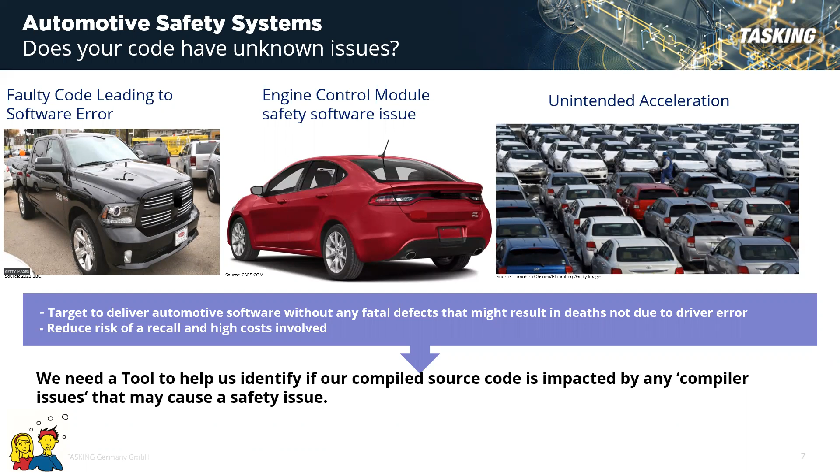What we need is a process and a tool support to help us identify such defects. Now let's look at why it is important and complicated to find out the bug. So vehicles are getting intelligent and safer every year. There might be 30 to 100 plus ECUs inside a vehicle running complex algorithms. The future vehicles may have a limited number of ECUs performing much more complex operations.

And this is because OEMs are trying to combine multiple functionalities inside a single ECU. This will in turn have a direct impact on the software because the software will get much more complicated. In practice, software from multiple vendors goes inside the ECU, thereby running millions of lines of code in it. It is possible that some issues are found in the software running inside the ECU, and this will be fixed by the person who is responsible for the software.

But there is one common thing amongst all the software vendors, and that's the compiler. Analyzing and fixing the compiler issues in the millions of lines of code is a nightmare. To overcome such a nightmare and to make the life of our customers easy, Tasking has introduced a new tool, and that's Tasking TriCore Inspector.

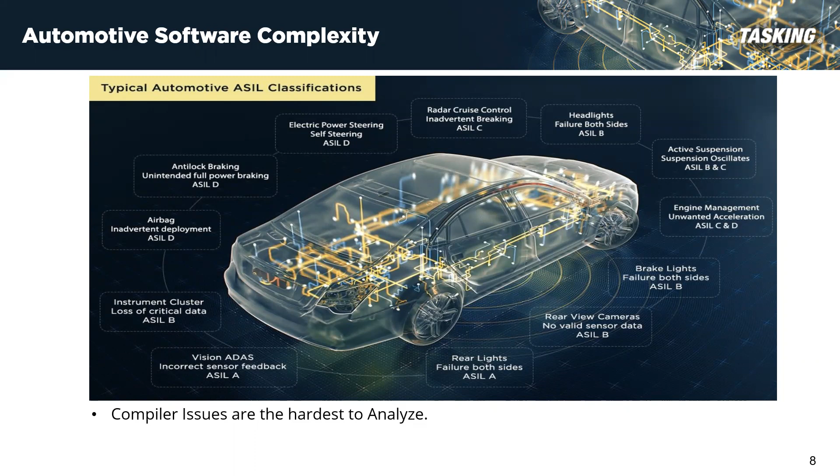We want to make sure users can run tests automatically to detect the toolset issues inside the software code, thereby reducing their risks. So, how can customers reduce such risks? This will be the content of the webinar, which we will discuss for the next 15 minutes. Let's take up a real life problem at the customer.

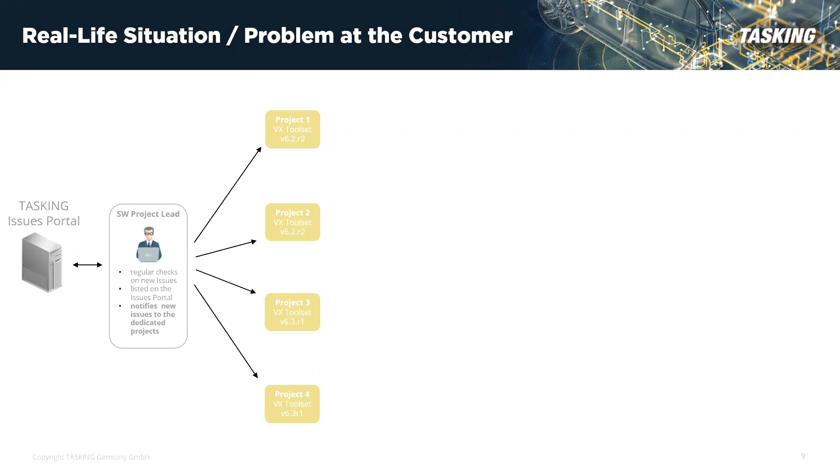Customer problem arises from the duties out of product liability regulation, which makes the system provider responsible for the specified product functionality. Depending on the intended use, let's say, for example, safety functions, the customer's risks are large. Therefore, the customer follows regulations and standards to reduce their risk, proving that they did all that is possible from their end. One of the customer's measures to have the risks controlled is state of the art sub-supplier management, which in our case includes the duty to monitor our errata sheet.

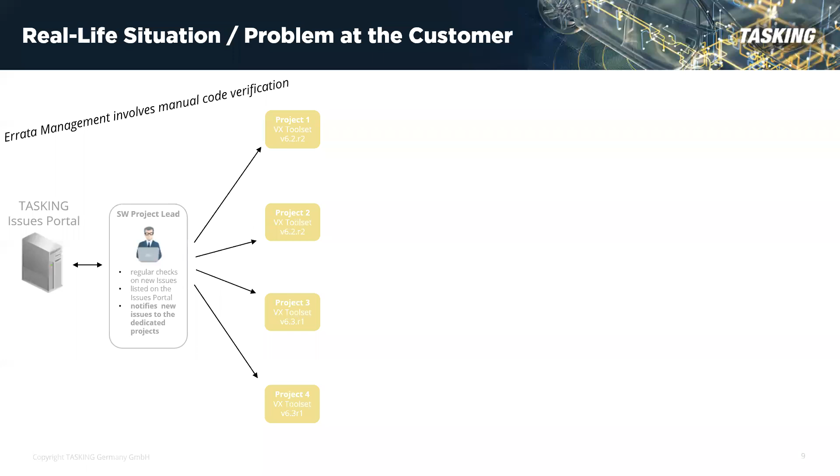So in the real life situation where your project is close to an SOP and you receive a safety critical compiler patch from the compiler vendor. So now you analyze your software and you have got two options. You analyze the software and make sure that you are not affected by any of the issues fixed in the patch, or you are affected and you apply the patch, test your software again, and qualify it for safety. So in both cases, you are spending significant effort and time on your analysis or code review.

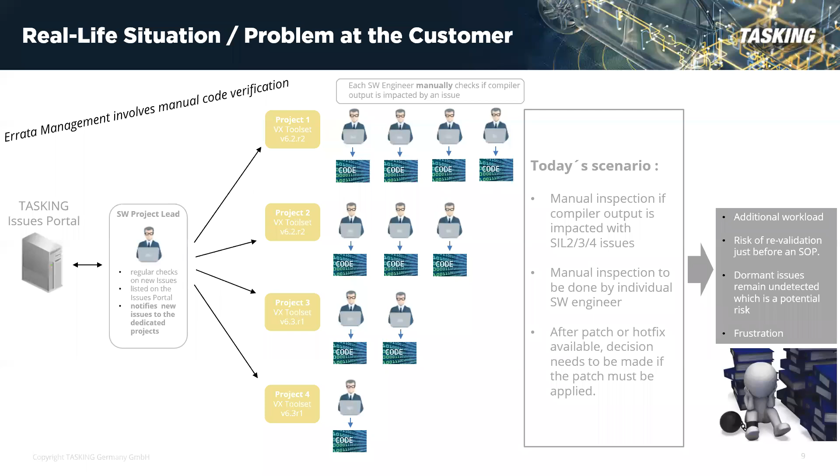So what if such an analysis can be automated? For that, what we need is a static analysis tool that can help us identify if our compiled source code is impacted by any safety critical issues, which could be a showstopper. Tasking TriCore Inspector is one such tool that makes sure you are not affected by an issue by running it on the whole software.

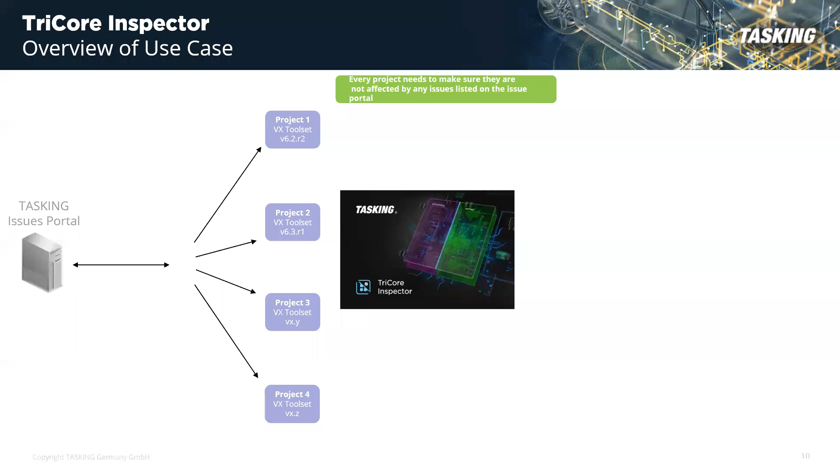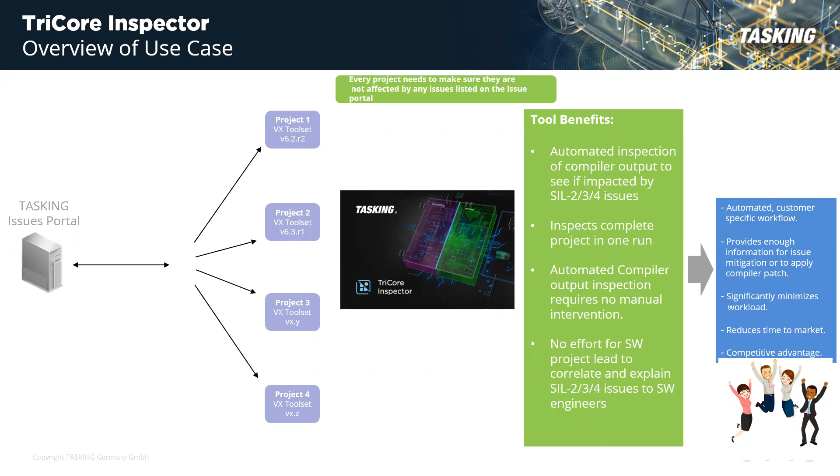And by this method, you find out what variants are affected easily and fix the code to that particular variant without wasting money and time. Ultimately, that's what we want, isn't it? Let's take a look at the functionality of Tasking TriCore Inspector and how it works. So what is this Tasking TriCore Inspector tool?

The inspector tool is based on the same technology as our TriCore VX toolset compiler. It's just that it doesn't produce any executable code or an ELF file. Inspector tool is the one that automates and lists all the compiler, assembler, linker, or locator related safety critical issues your project is being affected by, thereby making your life easier and reducing your time, so you do not have to go through every issue on our Tasking issues portal, which we provide you.

So when the warnings are generated by the tool, it includes the Tasking defect number, and the example is as shown. It's TCVX, TriCore VX toolset, hyphen followed by the issue number. And this is the format. So once an issue is detected, you need to review and determine if a toolset patch is needed for your project.

Inspector is version specific. The latest TASKING VX-toolset releases have their own TriCore Inspector. This means we have Inspector support for the two new versions of our VX-toolset, which are version 6.2 R2 and version 6.3 R1.

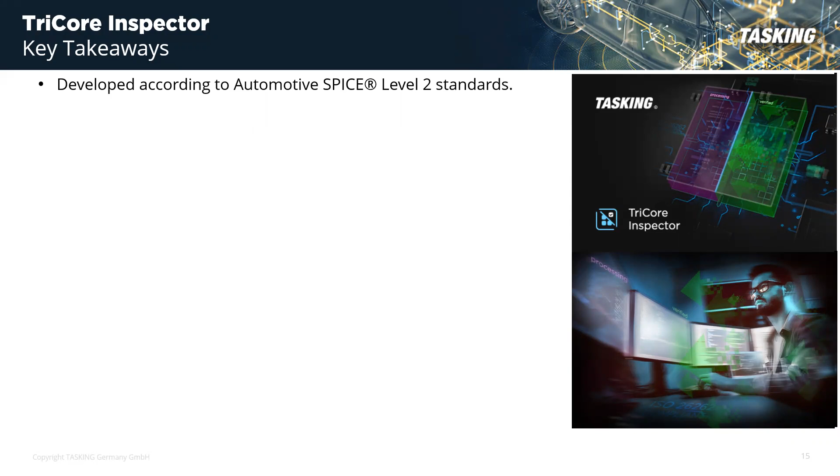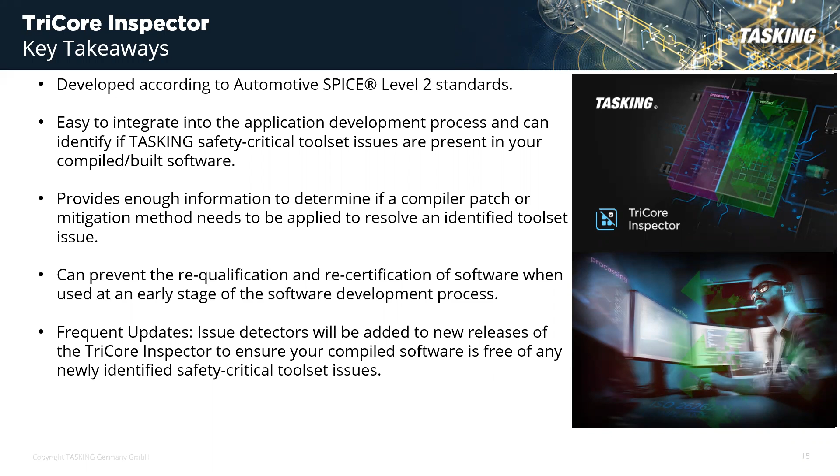It doesn't require expert-level knowledge to integrate the tool into the development process, and it detects all the safety-critical toolset issues present in your software in one build run. It provides enough information to determine how you should mitigate the issue, thereby saving your time. At any stage of software development, it helps you in risk assessment, preventing the need for requalification or recertification of the entire software. We provide support throughout your license term with frequent updates. With automation, we significantly reduce your time to market, save resources, and save money.